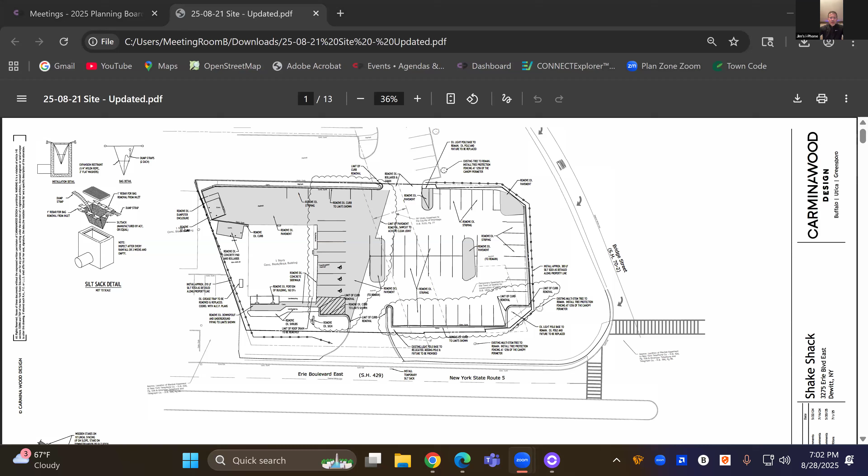Absolutely. We went to ZBA last meeting. We did achieve the parking variance that was required because the patio will have some seating provided on it. That triggered some additional cars in the variance that we needed. We also achieved the variance for the landscape buffer along Erie Boulevard. As with the DOT work, the property line had changed. We already had a bit of a variance in that, in a sense, but that variance was granted to give us the additional area for that buffer.

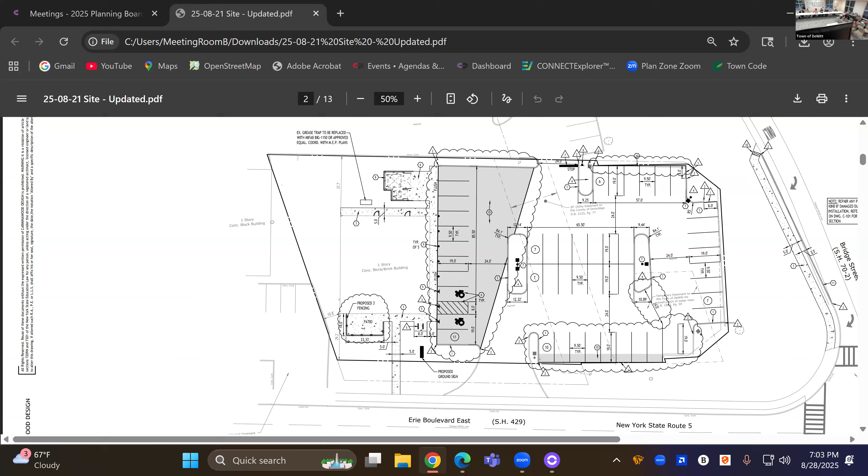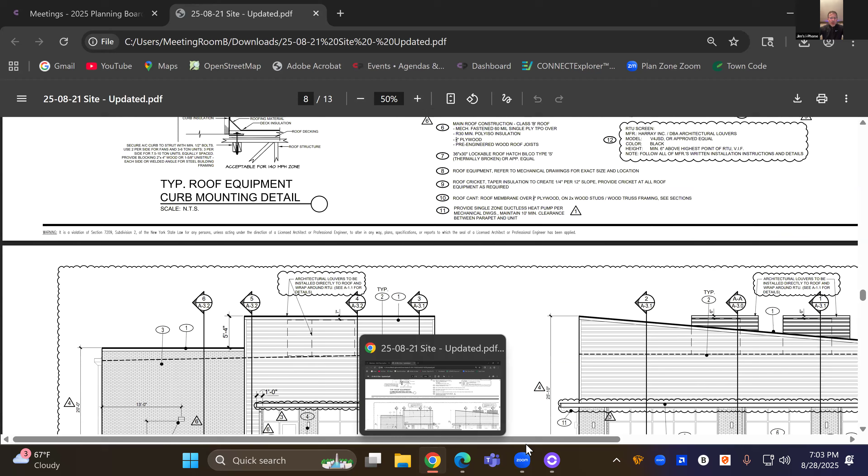Okay, very good. There were some conditions associated with the ZBA approval, one of which was the screening for the mechanical equipment. Can you just confirm that's the case and how you're achieving that, and that's shown on the current documents we have? It is, and yes, the comment was made that the rooftop units were visible, specifically coming down Bridge Street, looking towards Erie at them. So we have put a mechanical louver up on the roof that'll screen the 3 sides of that RTU that would have been visible. We took actual field measurements, and the agreement was we would go 6 inches above the highest point of the RTU, and that is represented in the new drawings. Excellent, okay.

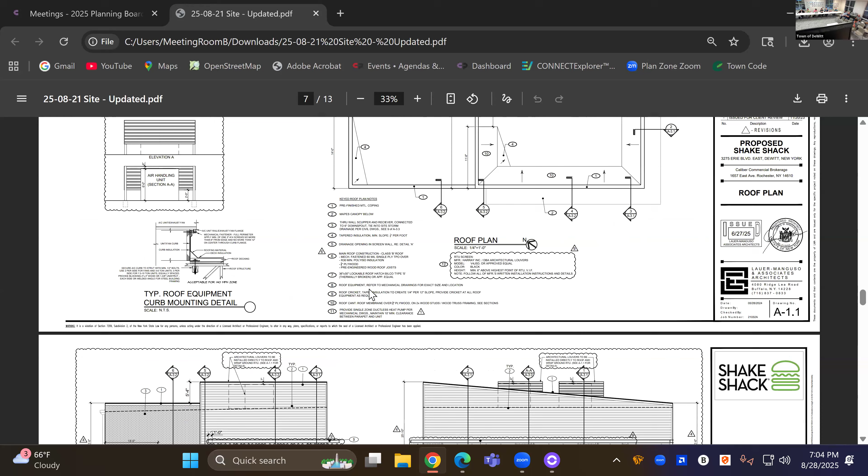Does the board have any questions on this final presentation? Okay. How about from the department, you guys are good? We're good. Good, okay. Then I have a resolution that I will read in favor of approving this amended application for Shake Shack.

This is a motion to approve the site plan drawing C100 as revised and dated 7/24/25, and the accompanying drawings C001, 101, 200, L100, LP100, A1.1, A2.0, A3.1 through 3.3, and E1.3, and the lighting cut sheets presented 8/21/2025, with the following findings and conditions.

There's an existing site plan approval for this site and use dated May 22nd, 2024, approved May 23rd, 2024. Applicant has requested modifications to the approval and site plan to accommodate a change in the parking lot layout, adding seating and fencing to outdoor patio area, revising the monument sign and lighting. These modifications require 2 variances from the Zoning Board of Appeals, which were granted on August 18th, 2025, as follows.

1, a variance of 13 parking spaces total on the site, so that the total parking spaces on the site will be 49 spaces. There was a prior variance in place for 7 spaces, so the variance will be increased by 6 spaces. This additional variance was necessary because the addition of outdoor seating on the revised plan required an additional number of parking spaces per the code.

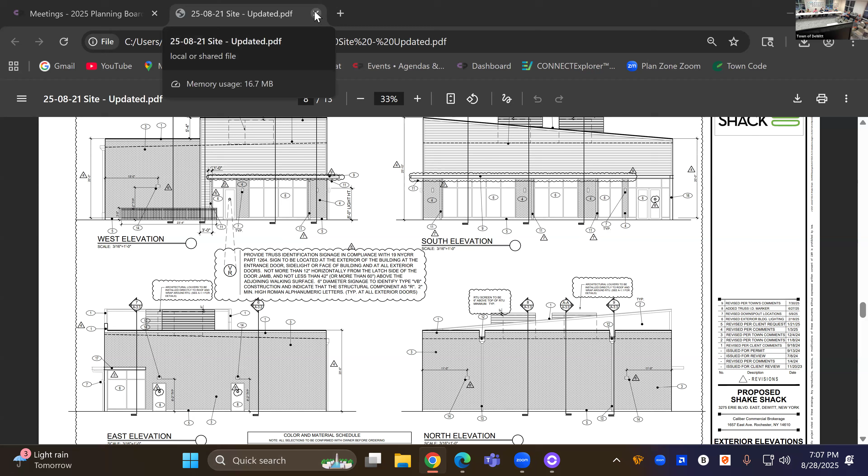Very good. Okay, next on our agenda is the Saab test facility on Collamer Road. Is the applicant here? Yes. I believe Aaron's online as well from EDR. Yes, I am.

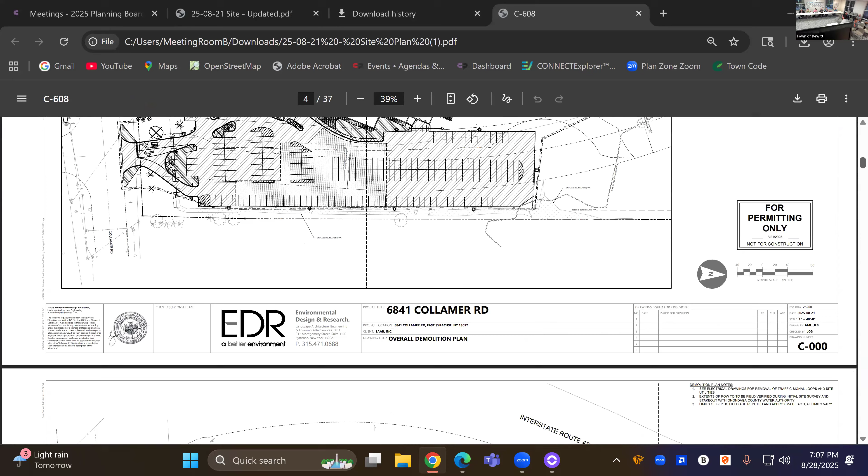Aaron, would you like to start or would you like us to start? What's Aaron's name? I can start for you if you'd like. What's Aaron's last name? Lehman, Lehmin. I'm with EDR, here to assist Saab with their application. And I'm Anthony Rojas with In Architects for the same application.

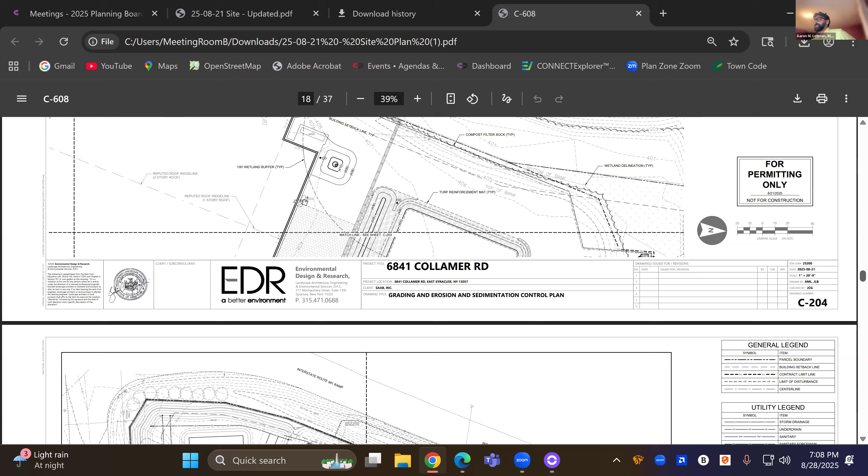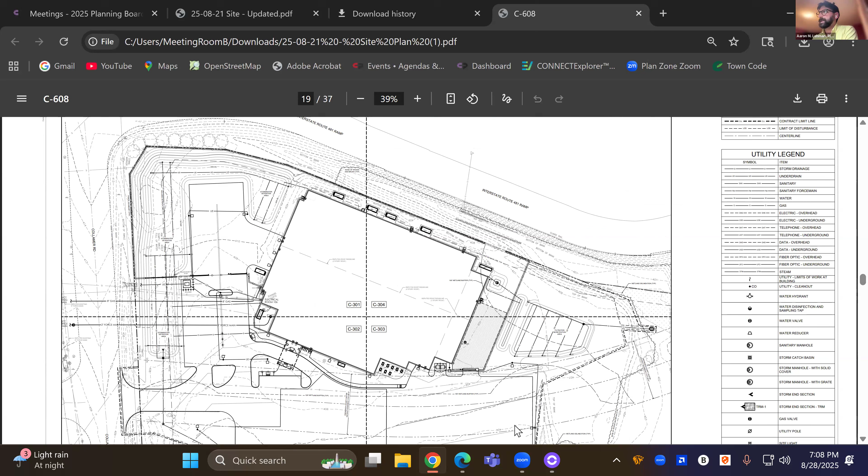You can go ahead, Aaron. So first, I'll just start by addressing the comments that we received in our last submission. The infiltration or filtration bioretention garden has been addressed. We have made the drainage layer 10 inches thick and added a detail of number 57 stone as per the engineer's comments. We have also updated the filter media and added the impermeable liner to meet the New York State DEC standards in their 2024 design manual.

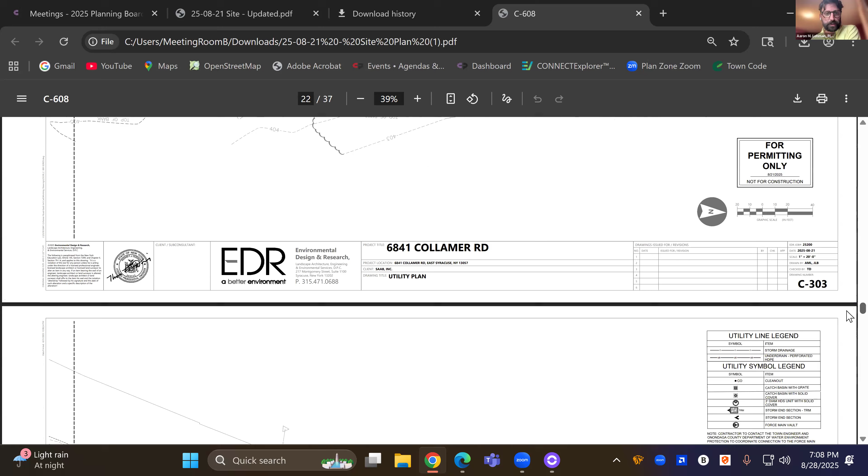The color selections have been made for the architecture plans, and I believe they have brought samples tonight if they wish to be seen, and they have been noted on the plans. We have provided the architect stamp and the final comment. We will be screening the transformer with vegetation as per the utility company's detail and not adding a fence.

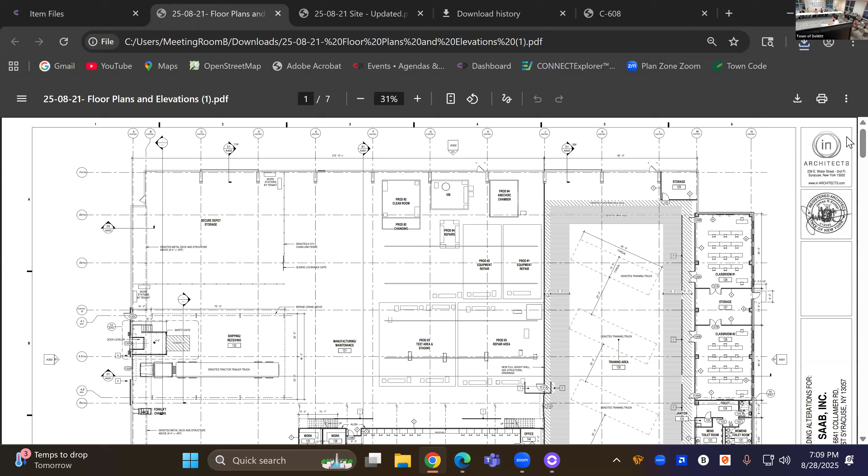And as Aaron mentioned, we do have a material board here. We have a couple, and I can pass this around. We've got a rendering that just identifies the different metal panel colors, and then a sample of those metal panels. We've got 3 different metal panel colors. It goes from darkest here to a medium to a light, and those are the 3 colors identified here.

The CMU block wall around the bottom of the building, which currently exists, will also be painted to match kind of the lighter color of that metal panel. And then the screens that you see here will be an aluminum fence that also matches the darkest value, as well as this fencing over here. So we're all staying within the same color palette.

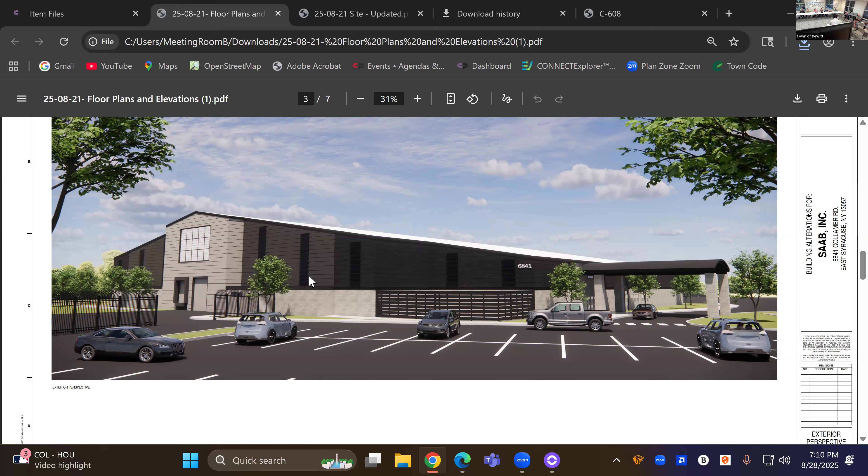The only difference with the metal panel itself is these kind of striations that you notice, which break up the monotony and the extent of it. It's really a textured metal panel with some undulation to create shadow lines, to again assist in breaking up the expansive continuity of that metal panel. From the roofing standpoint, it will also be a standing seam metal roof.

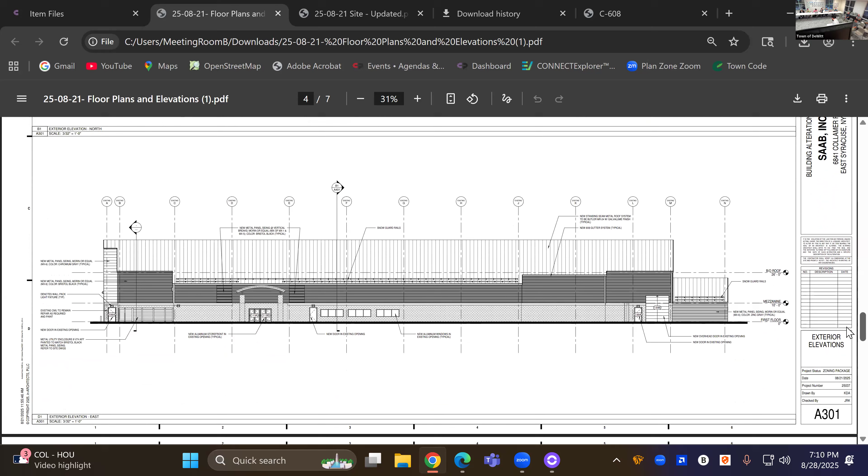Let's see what other materials—I think that might actually be all the materials. And the Kalwall is the translucent panel that exists in the center section here. That will also be replaced so that you have that same translucent material, but in a new upgraded format, so that it's not that yellowed type of color. It's more of a fresh install of the same translucent material.

Color of the roof? It's bright, like it's a gray, but with the intensity of the sun, it's really just going to look like a brighter version of that.

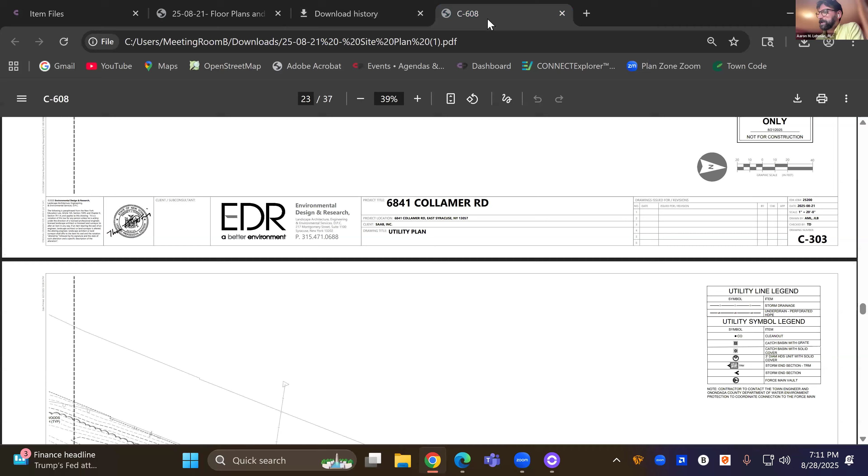Where did you say that the vegetative screening was? I'm sorry, I missed that part. No problem. So the National Grid standard is to have vegetative screening and not a fence. So we're adding a red twig dogwood, which will get roughly 6 to 9 feet high at maturity and spread anywhere from 7 to 10 feet wide.

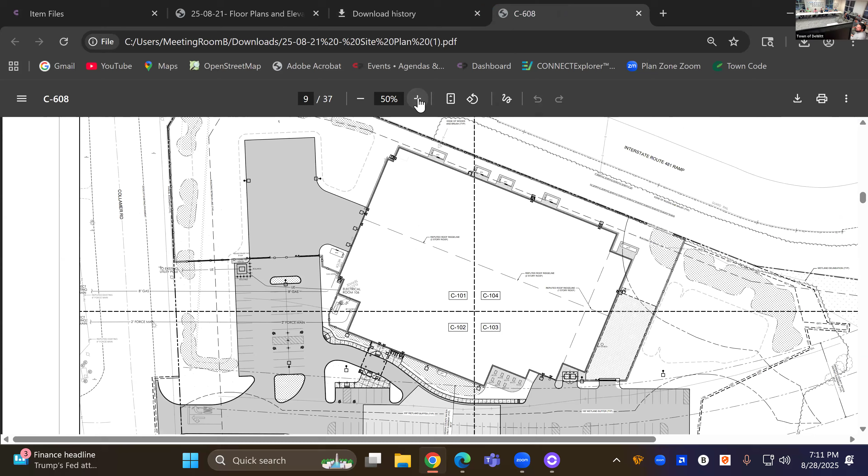It's around the transformer that's in the front yard. Yes, yep, it's right here. Yeah, that's it, right there. I could go to the landscaping page, I can't remember exactly which. We didn't show that transformer in that rendering, so it's not there on the program.

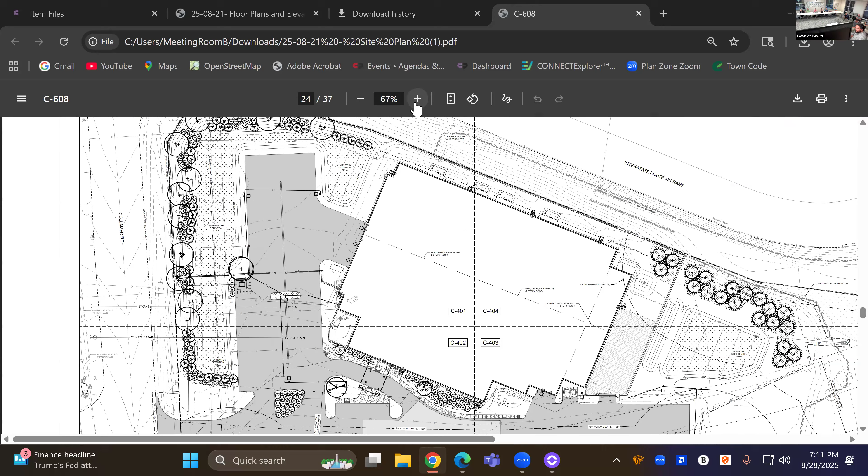It'll be the 400 series in the end. Yep, there we go, right there. Got it. Okay.

All the engineering and site comments have been addressed. And my understanding is there's no signage proposed, just the required building numbers, right? That's still the case. Any questions? Anybody?

Okay, I like it. And then on the material palette, you guys have any questions? No? I think it's pretty neutral.

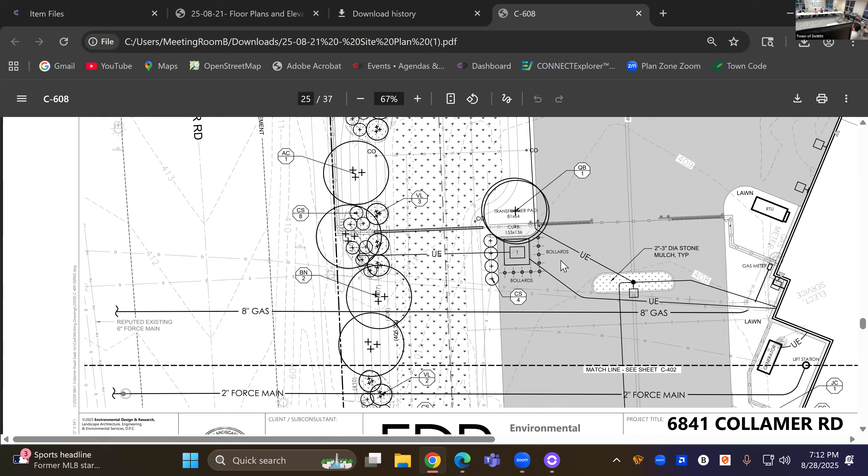Just the columns, what color are those? The same ones against the building, I'm calling them columns. Vertical, yeah. It'll be the vertical paint swatch all the way to the right, the square swatch. Yeah, it's a color to match the lightest metal panel, so this will come and match this color here.

These vertical pieces coming down, those? Yeah, those are just shadows that are cast, but they'll match the color of the panel next to it. So it'll be the same color, but you'll get kind of a shadow look because of the texture of that metal panel. Okay, so when you showed us that, that's more of a brown, but it didn't look that way on here. No, this is just to show the undulation of the panel. Thank you so much.

Okay, I'm going to read a motion. This is a motion to approve the site plan dated August 21st, 2025, including the architectural drawings dated 8/21/2025, and the photometric plan E100 dated 8/8/2025, and the lighting sheets dated 8/11/2025, with the following findings and conditions. And those dates are up to date, right? Yes.

The applicant has presented a new high-tech use for this property in a high-tech zone. Applicant has worked with the planning board to present a building and a site plan that is appropriate for the high-tech zoning district. The design, use, and site plan are an acceptable rework of a very different use and structure, being a prior sports facility building.

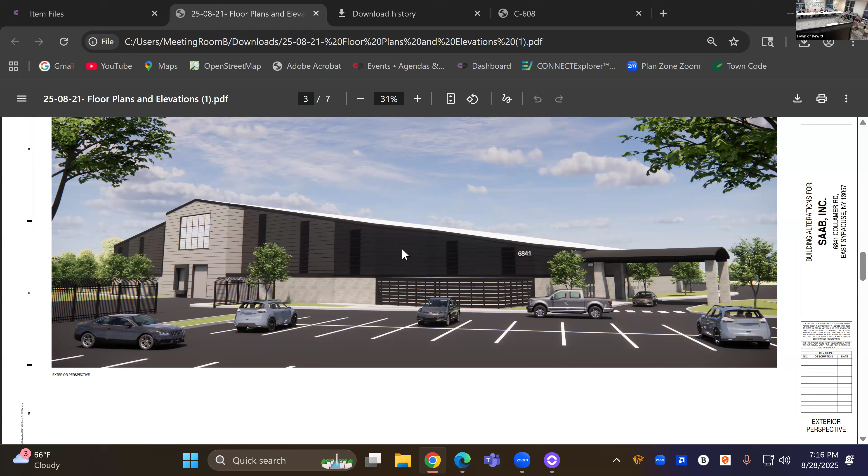This board has reviewed the SEAF of applicant dated 5/21/2025 and grants a negative SEQR declaration for this unlisted action. This approval is made with the further condition that it applies to plans and other submitted documents, site plan documents that have been signed by the planning board chairperson and the applicant, and requires that all of the work shown be completed by the applicant in order for the certificate of occupancy or compliance to be issued. Any proposed changes, additions, or deletions to the scope of work or materials from the site plan documents are not approved and are subject to further site plan review pursuant to Town of DeWitt Code Section 192-122.

Do I have a motion? Randy and Kevin. All in favor? It's unanimous. Very good, thank you. Thank you very much.

Would you like us to leave the boards or? You can take those. Okay, all right, thank you. Thank you. All right, have a good night. Thank you.

Okay, third on our agenda is Sunoco, also up for final approval. Yes, William Pitcher from WJP Architecture.

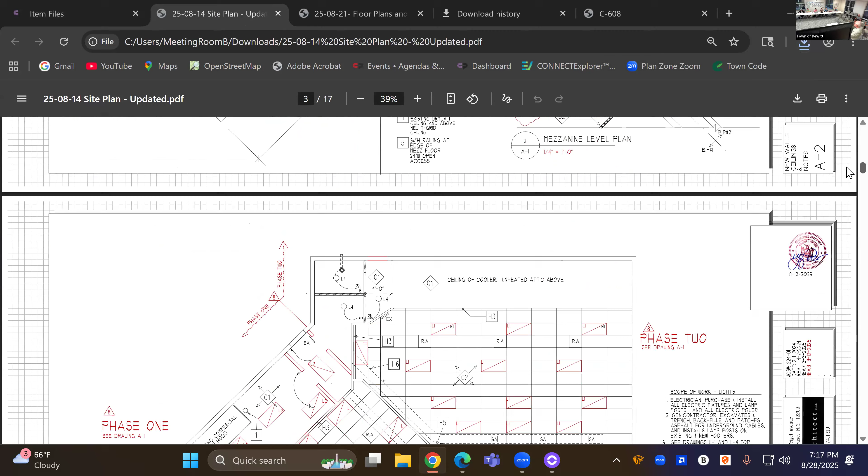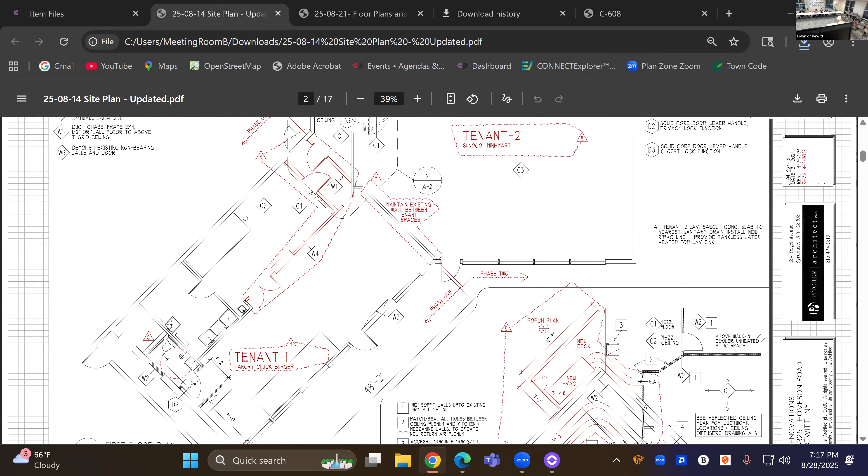Let's go to A2. What we're asking for, what has previously been approved, is a single tenant, single signage thing, and we were in the original approval removing that wall. In discussions with the franchise, Hangry Cluck, they want basically separation between the tenants. So that's the interior change that we're making, is to keep the two spaces, and that is the second tenant space. Going down to A5.

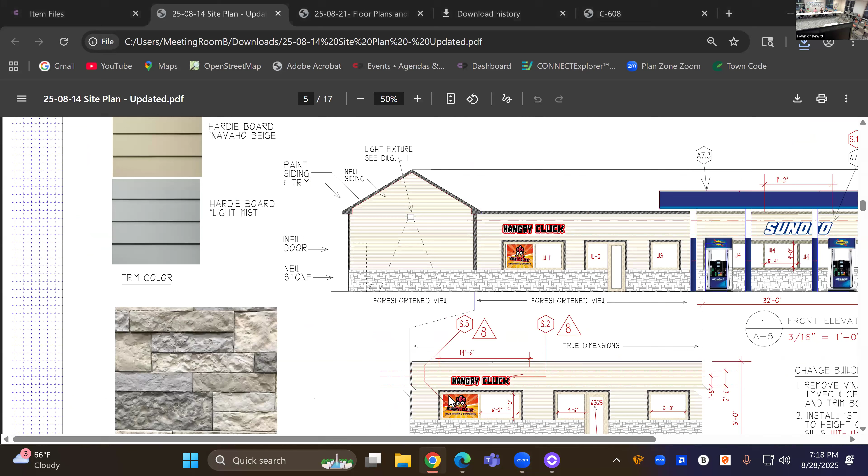Okay, the first tenant signage was previously approved. This is the second tenant signage that fits within the advertising band, and we also fit under the 25% area of window usage.

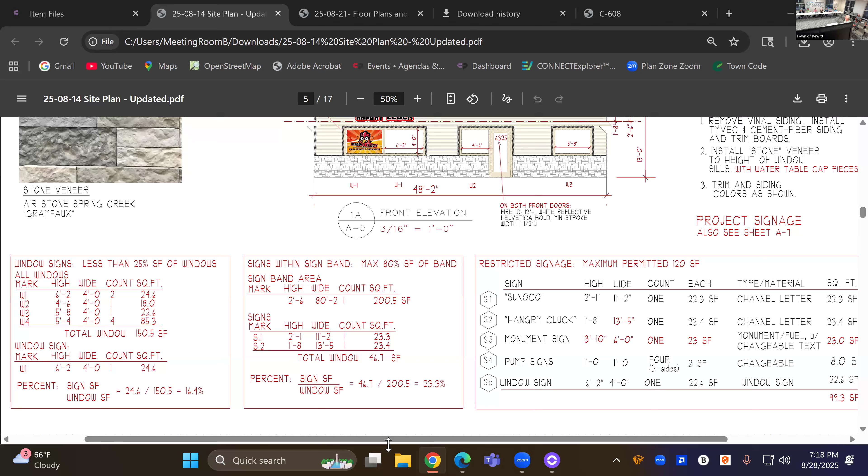And if you go a little further down, those are the calculations showing compliance with the zoning code. So this is a multi-tenant sign plan. If we go down another page, there isn't much change here. Right here on the bottom, the other change we had to make was that the HVAC units would not fit inside the building, so we are adding that screen around the ground unit, and we're building another platform porch for the second unit to sit up top.

Those units are fully screened, and they also face the back of the property, which is the creek and the woods, so they're not visible from the front road. Where's the screening? Sorry, it's so well drawn I can't even see the screen. It's a dotted line, it's right there. That's the fence screen for the ground unit, and the one on top of the roof is the same height.

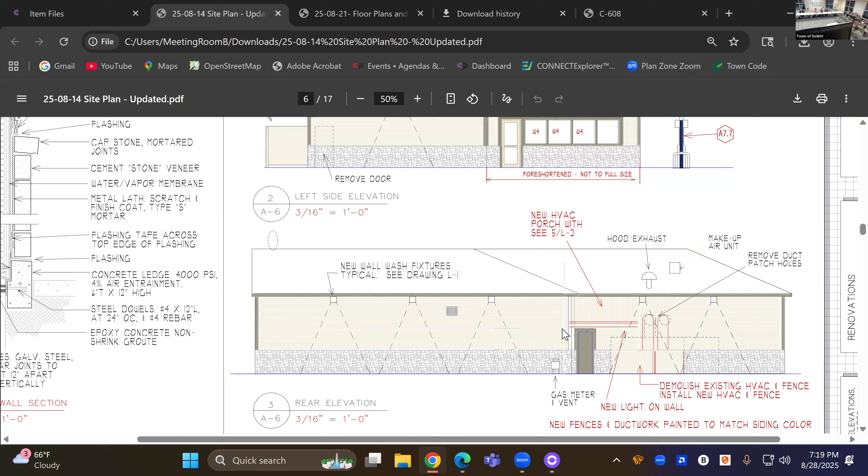We're talking 4 feet. So those are the changes there, and then going to the site plan down to L1.

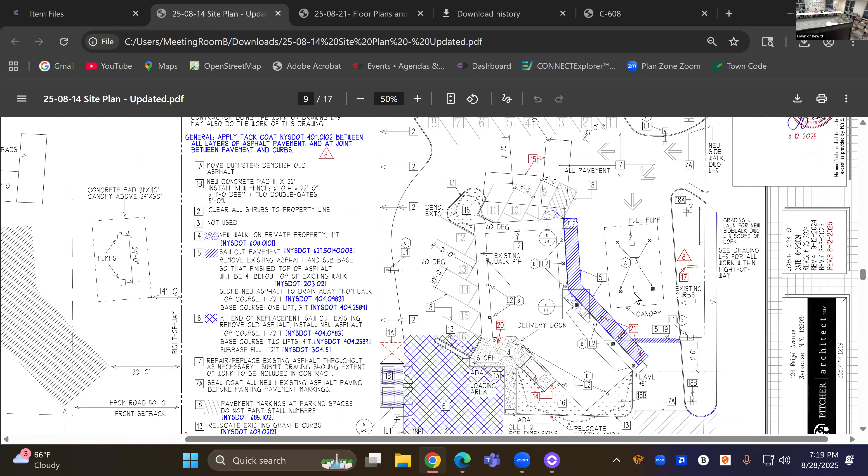Okay, in the original approval, we didn't have the existing monument sign, and we are requesting this time to maintain the existing monument sign. And the changes will be down a little further, the other way, right there, the bottom of this page.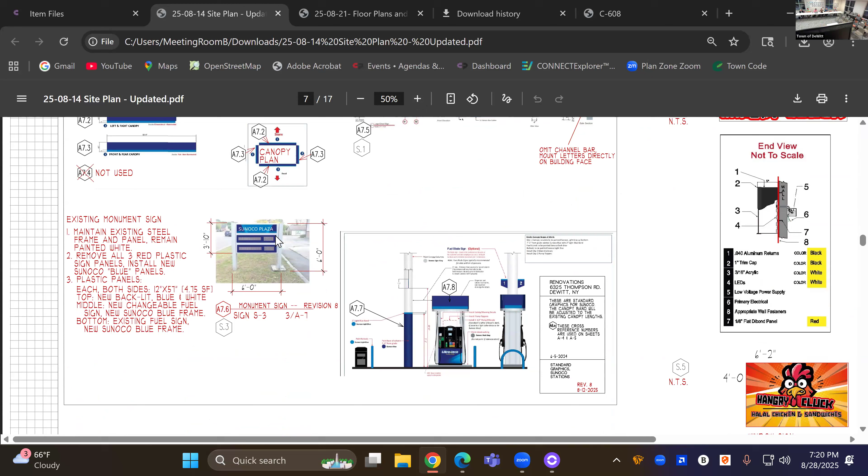And it had 3 bands, the existing sign had 1 changeable band and 2 solid bands, and we're proposing 2 changeable bands and 1 signage band. And all of those meet the square footage requirements.

Was that on the original or the prior site plan approval? No, no, this is something different. But so this is existing, the structure exists, correct? Right, the structure does, on the first set of approved plans it was shown as to be removed. And we have since decided to keep it rather than putting a new sign up. We're permitted the changeable sign under the code.

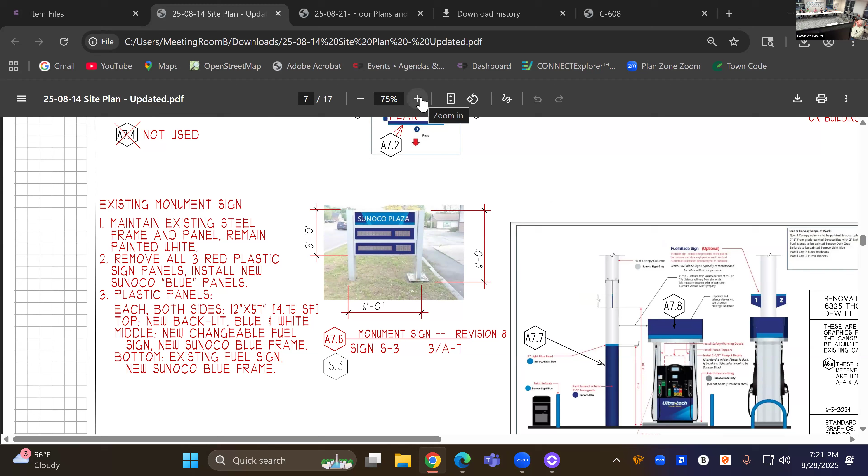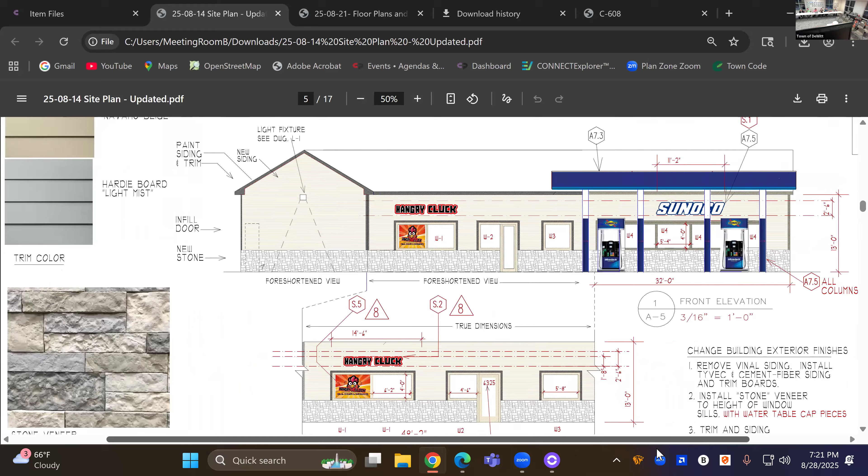I think that's it, unless you want to look at the interior drawings or see what's changed on the floor plan. The building mounted sign for the tenant, the Sunoco, that was previously approved, there were channel letters, as well as Hangry Cluck.

Down the next page, this is the detail from the signage fabricator that was going to make the fonts. So basically, this is your cross-section showing the letter and the wall mounting.

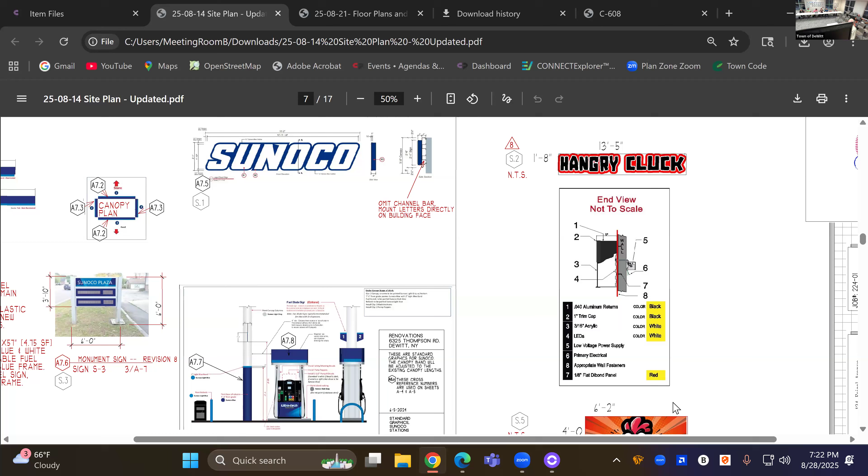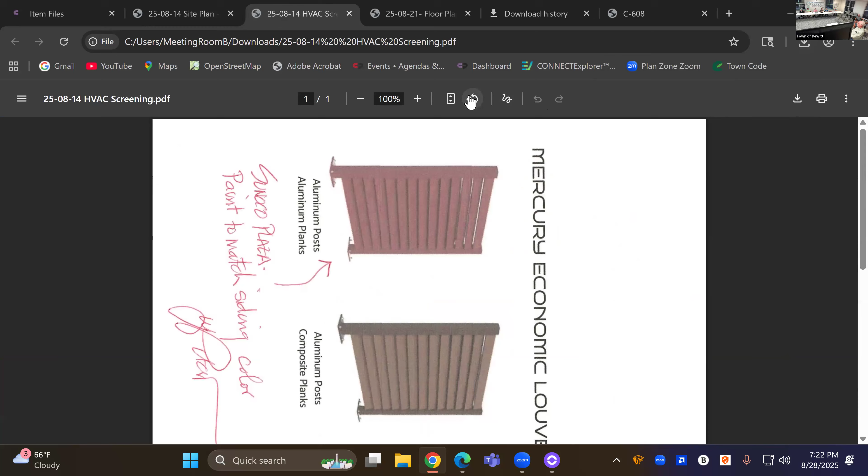Any other questions? Is there a cut sheet for the screening of the elevated unit, or any? I handed in a cut sheet for the louvers, it's an aluminum louver, there it is. This is for the elevated screening?

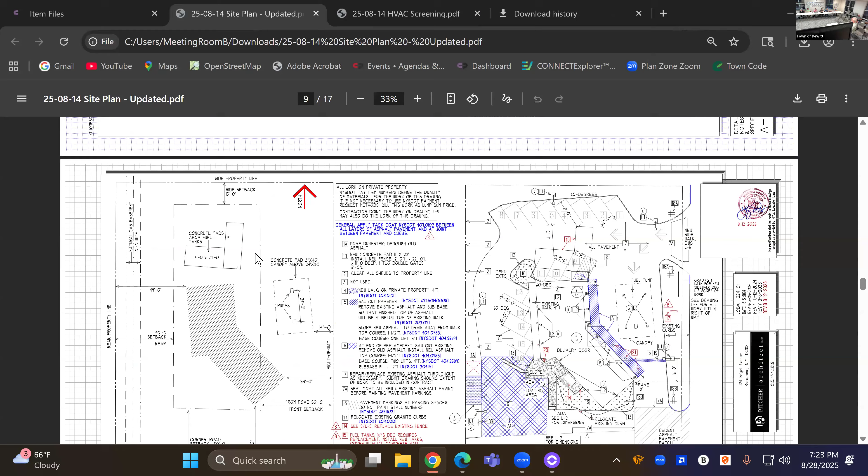Yeah, this is, well, it's going to be for the louvers on the lower level, because that's also the discharge side. And it's going to be on top of the porch, because that's the discharge side of the HVAC unit. So the fences are on the non-ventilated sides of the unit, the ends of the unit, and the louvers are on the front of the enclosure.

So this is the lower fence and louvers, and this is the upper platform, the porch roof. What's the porch deck? It's all going to be fabricated metal, square tube, steel plate. Like grating? No, because we're trying to keep it as a porch, so we're going to let it drain off of the steel plate rather than rain through the grating.

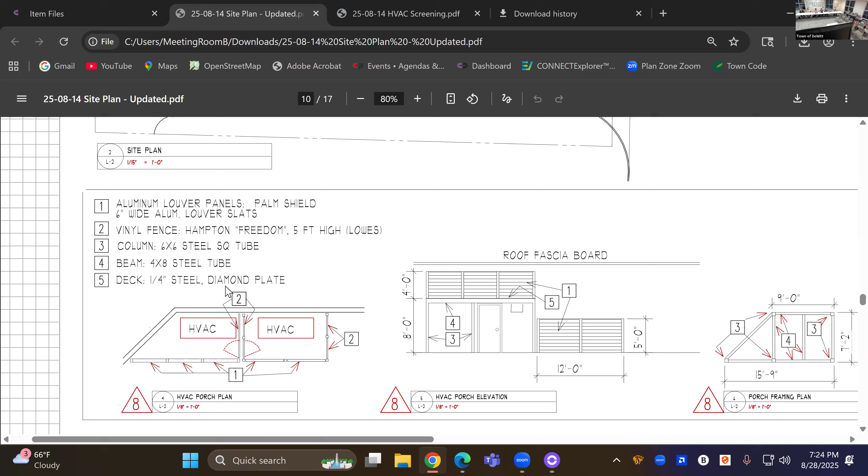You're not worried about it collecting snow? I wouldn't think so, because basically all of our discharge is in this direction, so I'm pretty sure the exhaust air blowing out of the unit will probably melt all snow between there and the louvers.

Well, I guess now's the opportunity, if you wanted to put in any snow retention, any snow pads on the roof, that's the time to do it.

Is there a maintenance panel? Is there access to get in? Basically, what I was looking at, these doors here, the doors in the fence, so on the lower level there's a door here, and on the upper level it's the fence here, and it's not shown, but the workman brings a ladder to service the equipment. There's no fixed ladder, so you don't have vandals getting up on the roof and on the equipment.

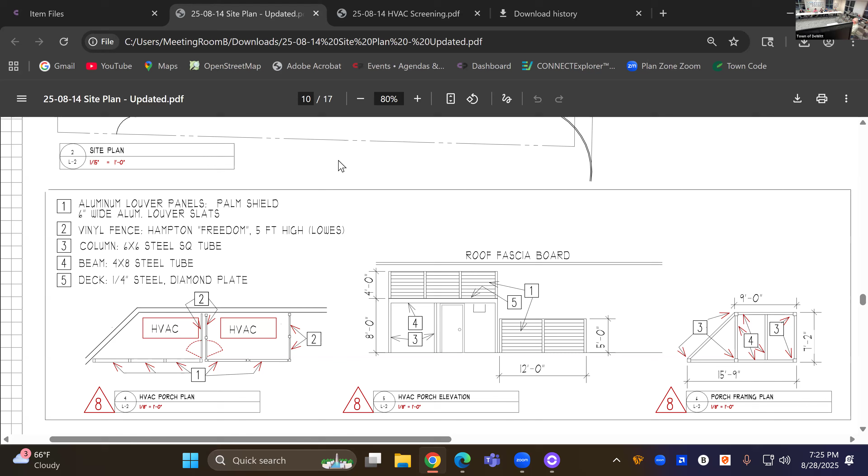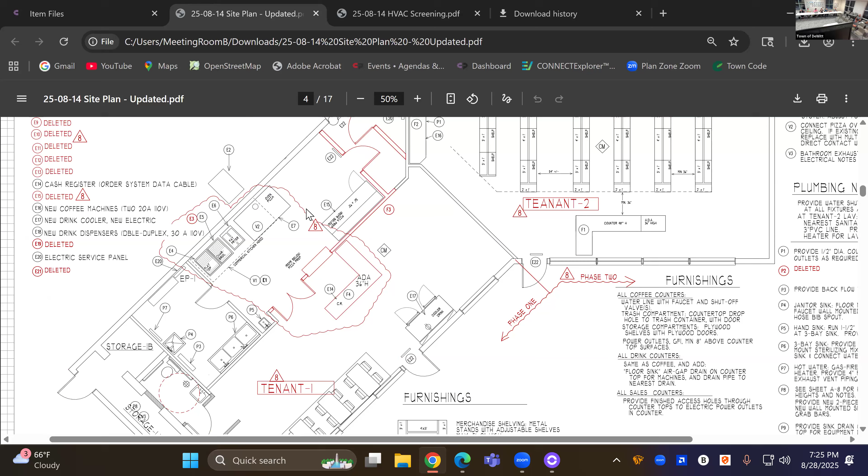Well, this is all in the back, it's not visible from the road frontage, right? Yeah, if we go back up to the floor plan, A2. This is where the fence is, this is the existing unit that was being taken out down a little more. And this is where the new porch is. If we go down to this detail down here.

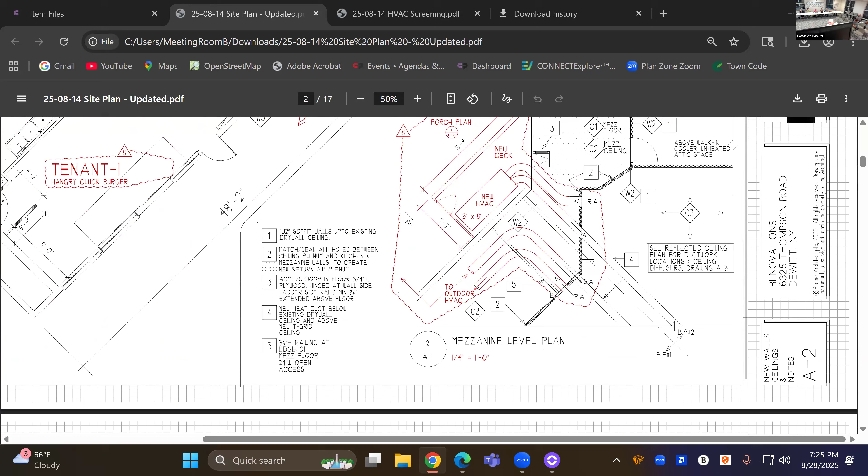Over. Oops, next page. No, oh, we're only on 3. Let's go up 1. Up again. Here's the detail. This is the platform for the HVAC unit. The fence is not shown on the floor plan, so it's all in the back, and it's all facing the creek.

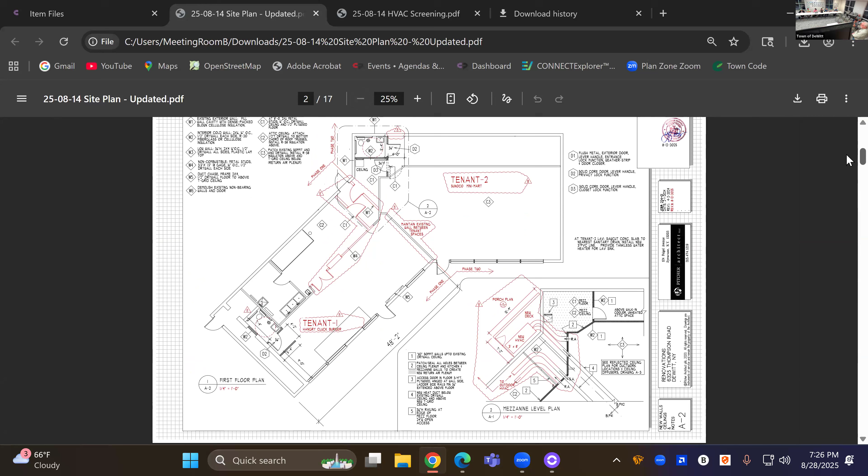Okay. There were no other comments from you? Nope, guys? Meets the multi-tenant site plan. Does anybody else have any questions? No? Maybe we should add a line to this saying that the tenant sign is accepted specifically.

Can we also just say that the monument sign is existing as part of that? Sure. Okay. Here we go.

This is a motion to approve the site plan as revised and dated 8/12/2025 with the following findings and conditions. There's an existing site plan approval for the site and use dated March 27/2025. The applicant has requested modifications to that approval and site plan as they are adding an additional tenant to the project, making the building a multi-tenant structure necessitating additional signage and modification to the monument sign. The signage plan, multi-tenant signage plan as shown, is accepted, noting that the monument sign is an existing monument sign. This approval is made with the condition that except as specifically modified herein, the planning board approval of March 27/2025 is in full force and effect, including all findings and conditions therein.

Do I have a motion? Bill? I'll make a motion. Doug? All in favor? I see everyone, unanimous. Okay? Congratulations. Thank you. Thank you.

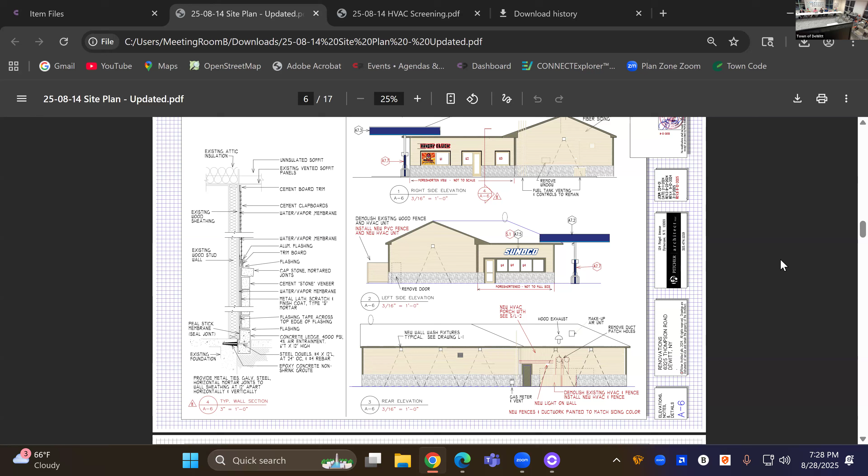Okay, the last on our agenda tonight is Dunkin' Donuts. Duncan? You're Duncan. I'm Duncan. This is it. So what's the question? What's your name? My name's Terry Summers. Thank you, Terry. So this is a concept presentation. This is kind of the first time the board is seeing what you're proposing. If you could give us 5, max 10 minutes, what the proposed scope of work is?

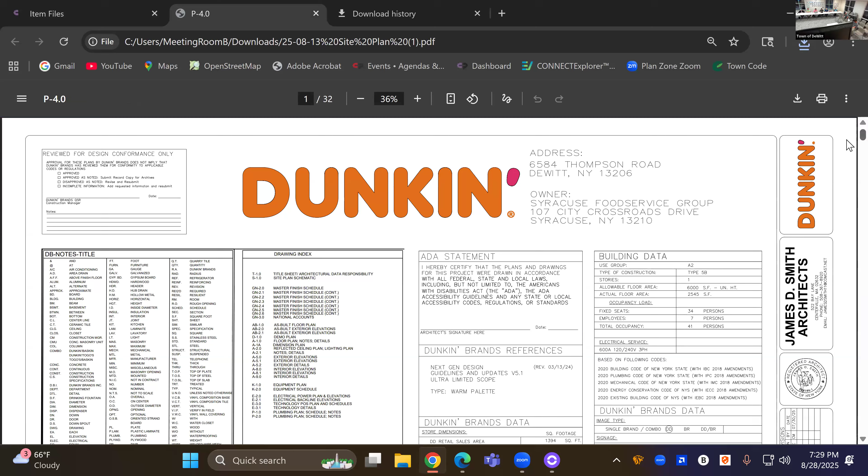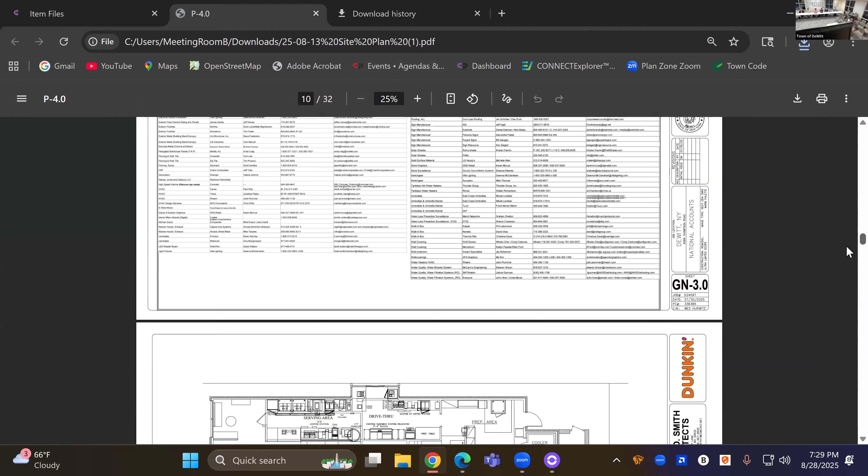Essentially, it's a paint polish. We've done them for most of the facilities around here. That's Tom Santori. Tom is one of the owners. This is essentially a paint polish, taking the exterior. We're not touching the brick, we're not touching most anything, we're just painting the siding, trimming, fixing up the trim work.

There's 3 signs right now on the building, it's gonna get reduced down to 2 signs. That's correct, Tom, right? What are you reducing? Tom, you're muted. Did you get Tom's last name? Tom Santori. Thank you. Hold on, we can't hear you. Can you hear me now? Now I can hear you. Yep, the exterior sign on the back of the building will be removed.

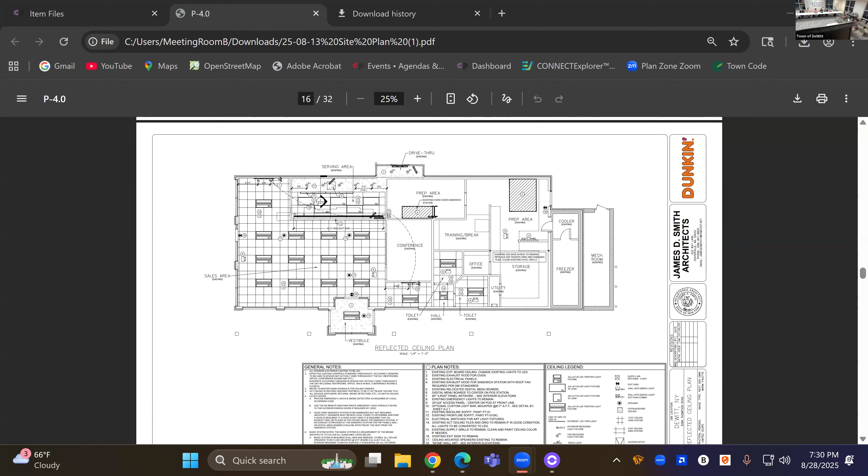Okay. Yeah, if you go up, you can see the existing signs that are there now. Keep going. So, right there. There's 3 signs on the exterior. Currently, we have 81 square feet of building signage, and we're actually reducing it to 56 square feet.

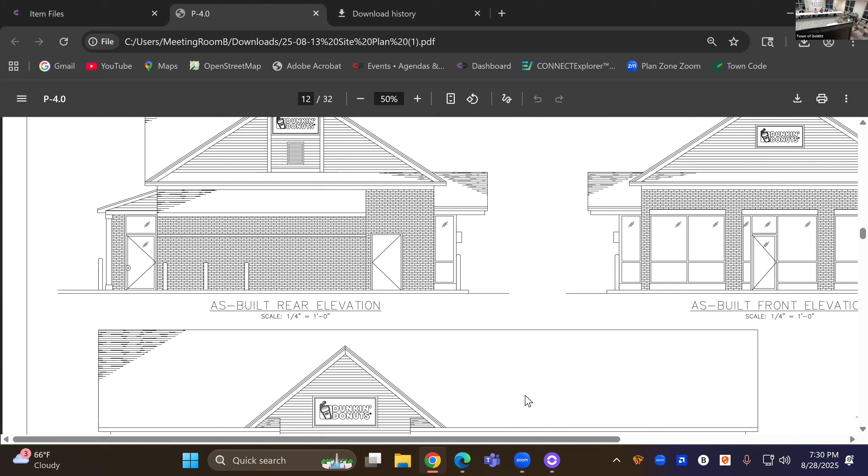So if you go back down, the existing monument sign will have the faceplates replaced with an updated one. On the same monument structure? Yeah, it doesn't change, just the faceplate changes. So is that monument sign 9 feet tall? No, it's like 5.5, maybe 6.

Are the drawings outside printed to scale? That's just a copy and paste, I doubt it. I mean, the current monument sign's been there since we got approval for that project. Roughly how tall is it? The top of the bricks, yeah. I'm gonna say 6, 7 feet tall.

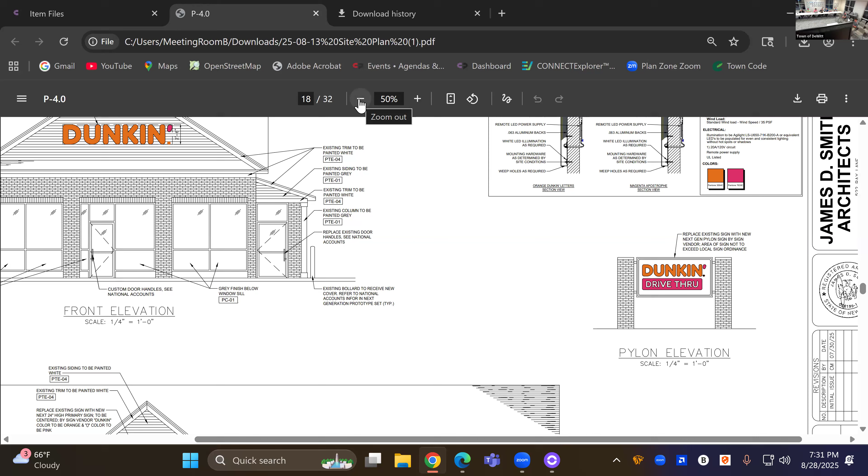We're gonna need dimensions on that. Okay. Yeah. So when we built that property originally, everything was per code, approved variances. So my question is, all I'm doing is changing the face that's on the existing sign that was legally allowed on that property. So what question do you have for me? The question was, from the drawings, it appears that it's 9 feet tall on the scale that was used. Yeah, they actually put a scale on that thing, but...

Never. I mean, that's honestly, it's a cookie cutter drawing. They don't go out and physically measure. The only thing, per my franchise agreement, the only thing we have to do is change, it says Dunkin' Donuts, it has to say Dunkin'. That's it. Nothing's changed physically. It's the same exact monument sign that was approved or had a variance, grandfathered. So I just don't understand the problem with just changing a face.

If it's actually 6 feet tall, there's no problem. But we need to know the dimensions, when it was approved. The town of DeWitt approved it, so what's the problem with just changing a face?

You have to check your records to make sure the variances were approved. We've already pulled the variances, we just need to see the sign dimensions. The physical sign dimensions are the same.

It's a face, we're changing a face. We understand, but you need to see them on the plans, dimension the exact existing conditions, please. I can take care of that tomorrow, Tom.

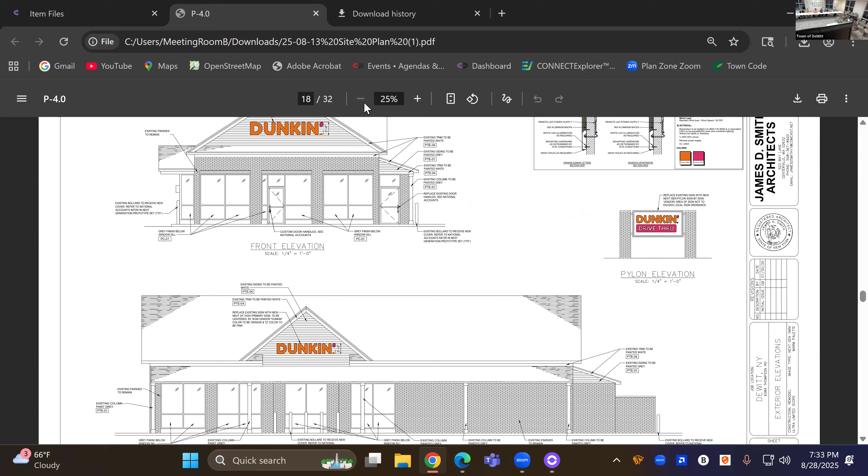Directional signage, wayfinding signage? Oh, painting on the asphalt? No, the sign at the end of the page. You're talking about your entrance signs, Tom, are you going to be using those or not? No, your signs, directional signs, it looks like you put them in the ground.

Can you see our screen, the screen that's being shared? No, I don't. I see. I had to make sure. Hold on one second, I think it is, because I thought I had that selected.

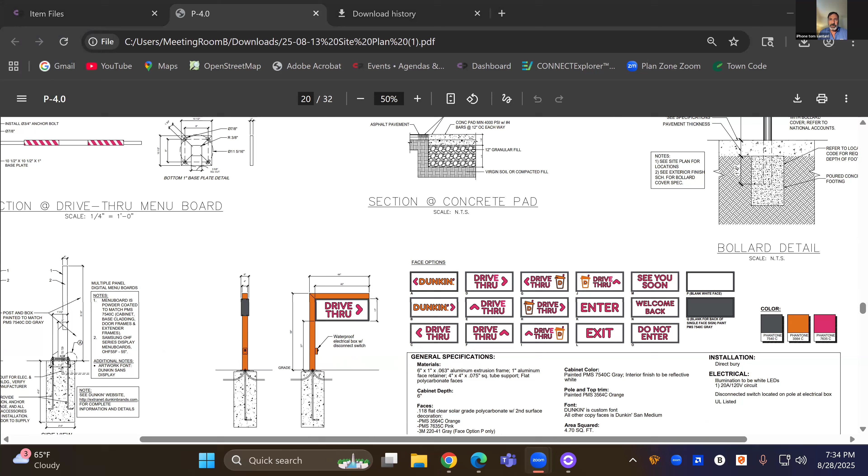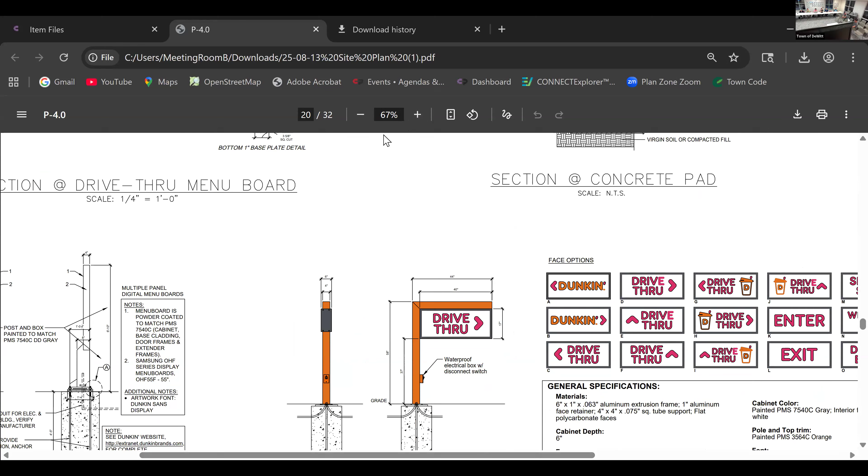Basically, whatever's there, the only difference would be it changes to Dunkin'. You're not adding any signs, other than any of those cookie cutter things, they're not going to be using them. Any of those on the plan, existing or proposed, whatever's not being used on this site, we don't want to see it on the plan, it just causes confusion.

Can we talk about the pavement markings too? They're eliminated, that's a Dunkin' cookie cutter thing. We don't paint pictures of cars on the parking lot. I'll mark those off too, take those off the plan please.

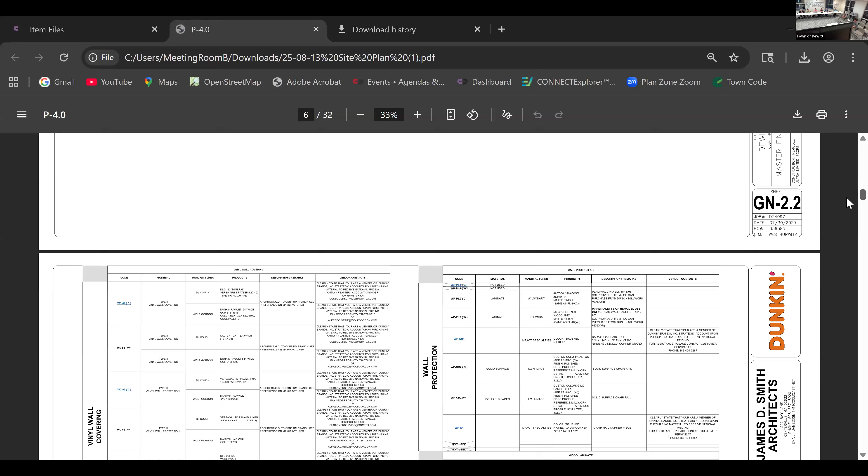Okay, that's easy enough. Are there no other pavement upgrades? The only pavement upgrades, I'll have an asphalt company come and fix all the potholes and saw cut. Nothing's physically changing other than making it smoother.

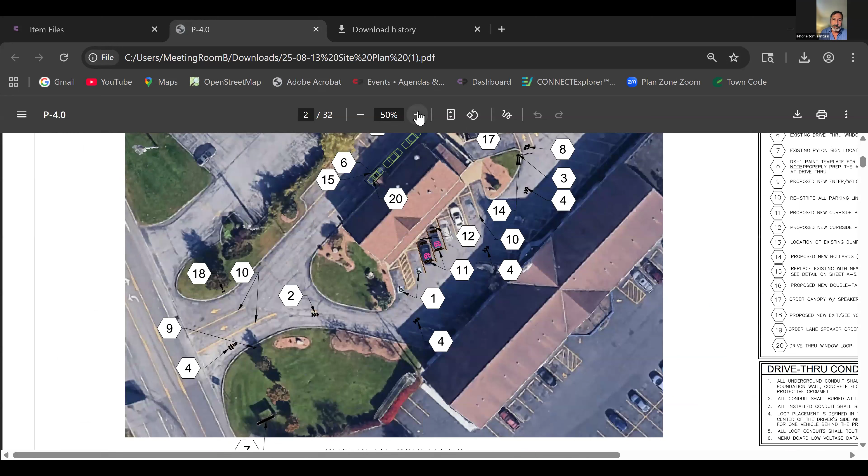What about the clearance bar? You want to change that out, an updated one and a menu? I could change it to the most current, or we could keep the same one and just paint it gray.

Basically, we want to see what you're proposing for this location, not just an option of everything that's for corporate, all the locations. We just want to get an idea of what you're proposing to do with this scope of work. All right, I'll make it exactly what this project entails.

I'll make it real simple. The monument sign physically is staying the same, I'm taking the face off, putting the word Dunkin' instead of Dunkin' Donuts. The menu board is in the same place, we take it out and put a digital menu board. The height bar either stays the same physically, or I take that out and put a new one.

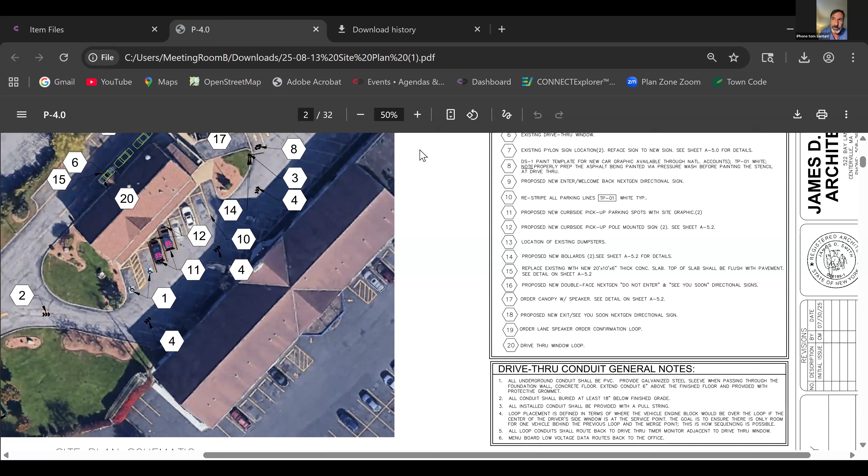Any enter exit signs will be in the exact same place they are, we take the face off and just put a new logo on it. The parking lot will be repaired to make it smoother. Is it being restriped? Restriped exactly how it's been for the last 20 years. Do you want it restriped? No, that's fine, but you have some parallel parking spaces here, that's not allowed.

We could update whatever you want. Basically, everything's staying the same, it's really a simple project. We're keeping everything physically where it is, keeping the brick exactly how it is, we're not painting the brick. The soffit has some painting done. The vinyl siding that's existing will be painted to the current colors, which I believe is like a light gray.

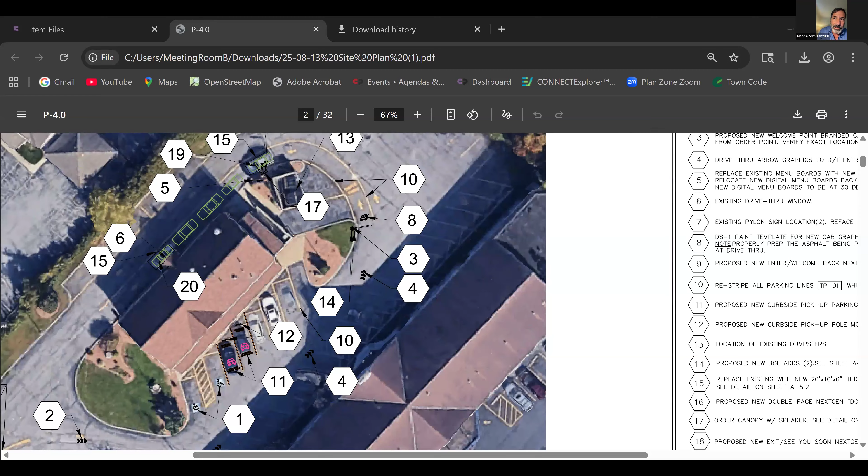Landscaping will just be improved to physically exactly where it is, just make it look nicer. We're making site lighting upgrades - no, actually no site lighting or lighting changes, nothing. It's basically what's there, we're just making it newer.

We hear what you're saying, just make sure the drawings also say that, exactly what you just said. That's the takeaway from today. Yeah, and Terry works with our architect, he knows what we need done. He's built 20, 30 projects for us.

So how about the dumpster enclosure? I spoke to Terry two days ago. It's a masonry enclosure, we're gonna repair it. Right now it's cinder block and in bad shape. Terry's basically going to have his mason repair all the bricks or replace the whole structure. Physically, you won't even know the difference. It's going to be a brick dumpster enclosure.

Again, if it's replaced, we wanna see it. Yeah, it won't be replaced, it's basically making it look brand new. A lot of bricks are pulling away from the CMUs, so we're gonna repair all that.

You planning on doing a new gate for it as well? I'll have to see what kind of shape the gate's in, if we've gotta replace it. It looks pretty bad, it's rough.

The town requires self-closing gates for the dumpster enclosure, you can look at our code, there's a section on dumpster. Is that like in the pole where the gate is? It has like a spring-loaded thing that self-closes, or how does that work? Essentially, yes. So self-closing means basically if no one's there, it closes by itself.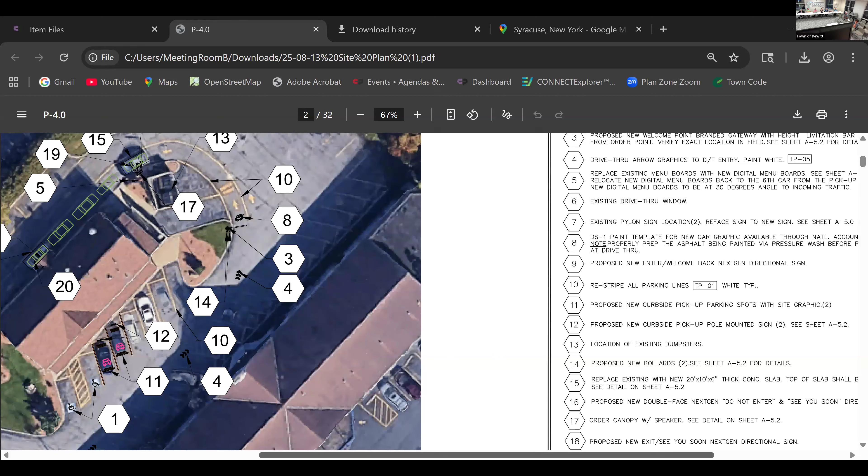So the monument sign, can you pull up that image again? The town code doesn't allow drive-through on there, it can say Dunkin', but it can just identify the property. It should have the address on it too, technically - the street number. And that's another thing too, is the address 6504 or 6584?

Do we want them to work with the county? Call county planning, because we're having trouble figuring out what the address is. I couldn't find it either. County planning handles 911 addressing for the county, and you should reach out to them because you want the fire department to be able to find it. If there's a problem with the address, you're gonna have trouble getting the fire department there.

Typically in other areas we require buildings to put the address numbers on the building - do you need that? Yes, put it on the monument sign. Oh right, on the monument, yeah, it can just say the number, like a placard on the column of the bricks, or where it says drive-through, because you're not allowed to say drive-through.

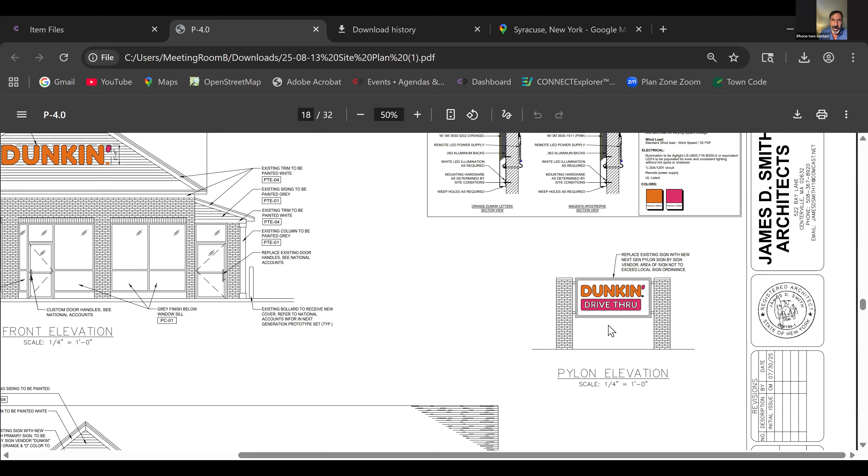Why, is that a bad thing to say drive-through? It's just not allowed. Our signs can just identify the use. Oh, is it illegal to have a drive-through? No, I mean, it's not illegal, but it's against the code. The code just says your monument sign can only have the name of the business.

So you don't want us to succeed as a business? Well, I don't really like the banter much, but there's a town code and we have to do what the town code says - that's the parameters we work within. Yes, perfect, we'll abide by everything your town wants to do.

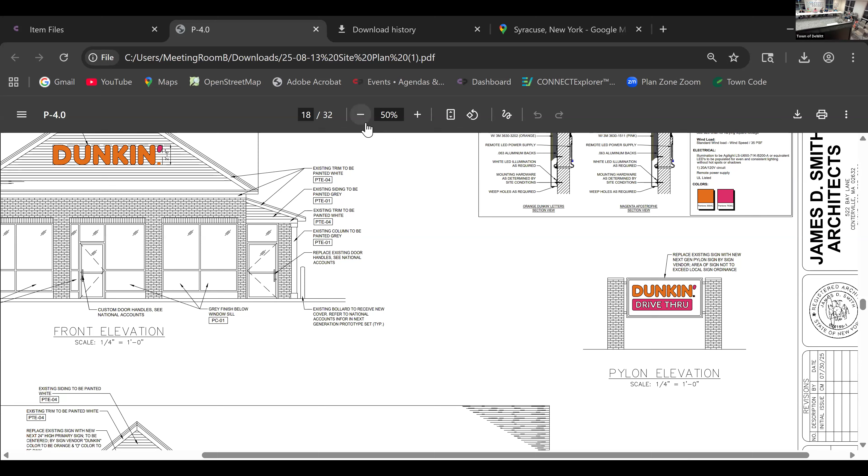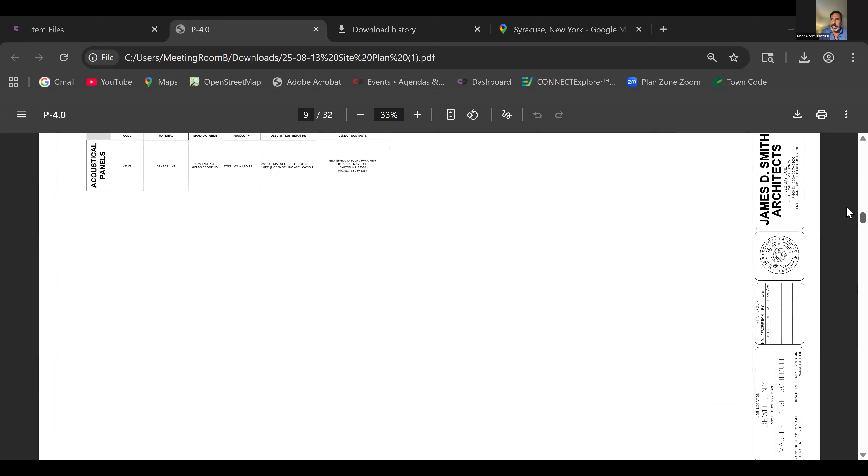I heard you're not doing the pavement stencils, are you doing mobile pickup signage? No, none of that. The existing parking spaces will just be restriped the way it is right now, except for the parallel spaces on the side here. Correct.

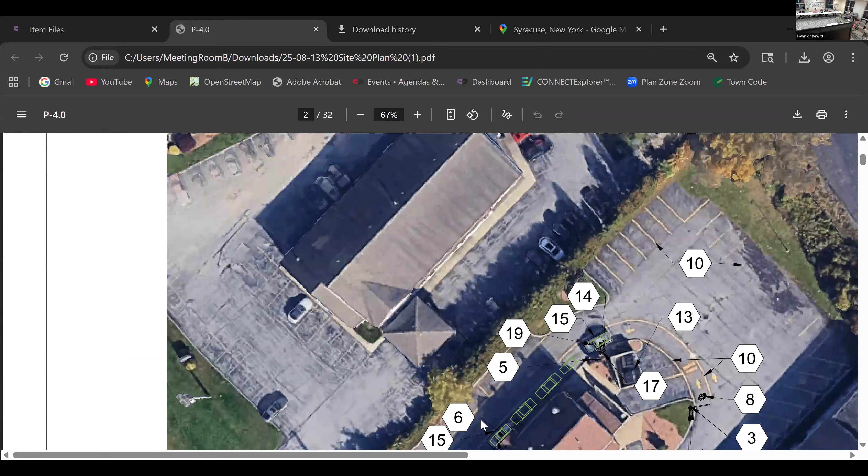And Tom, I'll take a drive-by to make sure. I'll measure up to your existing monument sign and we'll mark up a drawing and get back to you.

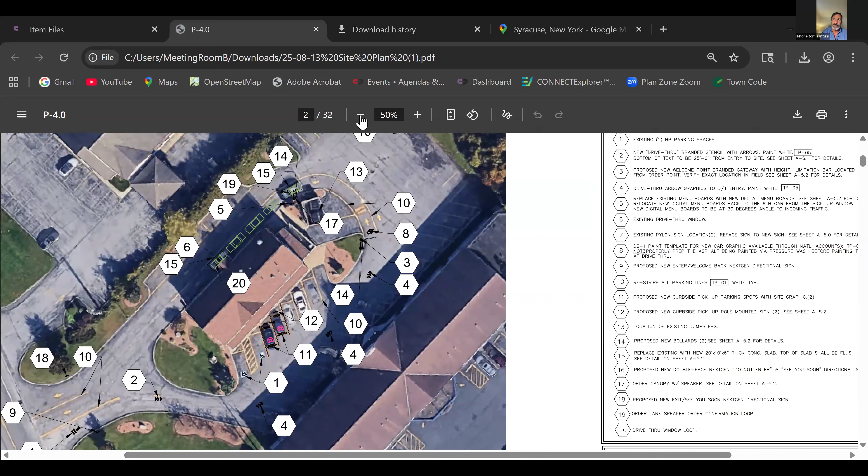So basically I was going through these points and there's a lot of things on the plans that doesn't sound like you're doing. That's the main takeaway from today, we kind of pick and choose. Yeah, the goal is just to make the building look better and make us profitable to be able to still do business.

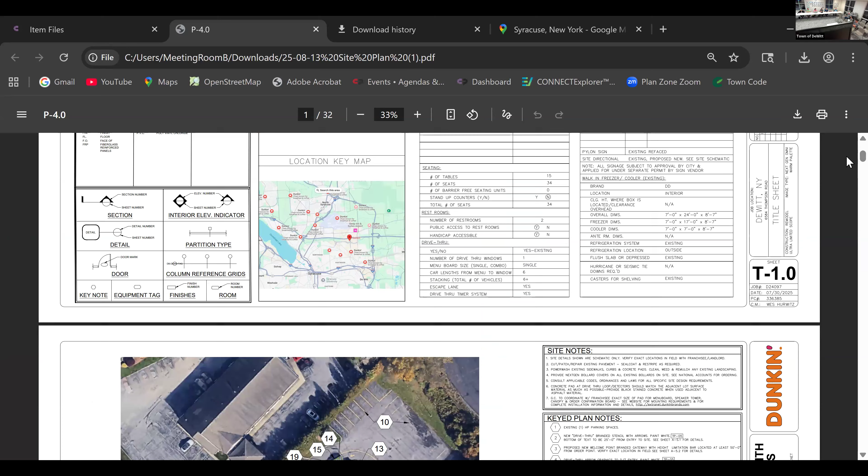Absolutely, and appease Dunkin', the Dunkin' brand. If you have any questions, Eric's available. If you go out and wonder what you should do, you can check with him, because we're just trying to live up to the code. There's no real magic to what this board needs to do, it's all in the code.

I apologize, sometimes common sense is what I live by. My goal is to have a successful business in that area, make everyone happy, pay taxes, employ people. At the end of the day, you have to have an ROI to have a business, so you just have to use some common sense, that's all.

These comments will be provided to them as well, a comment list, is that true? I'm not so sure there needs to be a comment list, I'd rather see another submission first and then provide comments. Can I get it right over to you tomorrow? Absolutely. Okay, we're here? Yes. Okay, perfect, thank you.

Quick question, so once we get all the ducks in a row that we need and you guys are satisfied, what's the next step to get a building permit? Once you get site plan approval, then you'll apply to the Department of Planning and Zoning for a building permit. Typically, how long does that take?

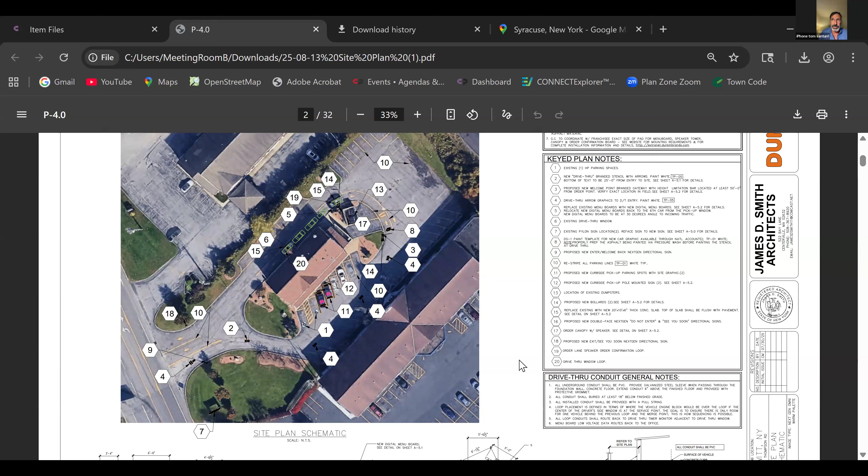Usually within a couple of weeks. Okay, so we were hoping to start the project in October, you were looking for September 26th or 27th to get underway. Well, the next meeting, if you get the things in, will be September 25th. Today was the deadline for our September 11th meeting, and September 11th is the deadline for the September 25th meeting. So I can't even get an interior permit? You can't get a permit until you have site plan approval.

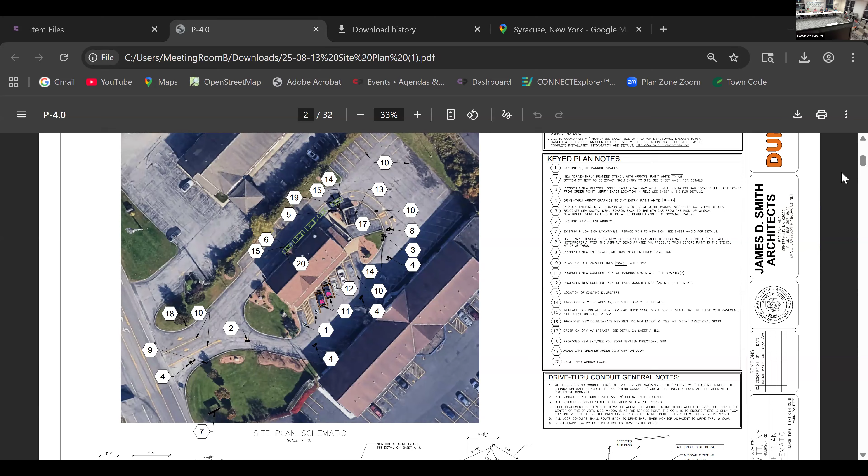What if I separate site work from interior? You have to get site plan approval first. What are the interior changes you're making? We're just changing out a bunch of equipment, which means I may cut the floor in some areas, put some plumbing in, and put it all back together.

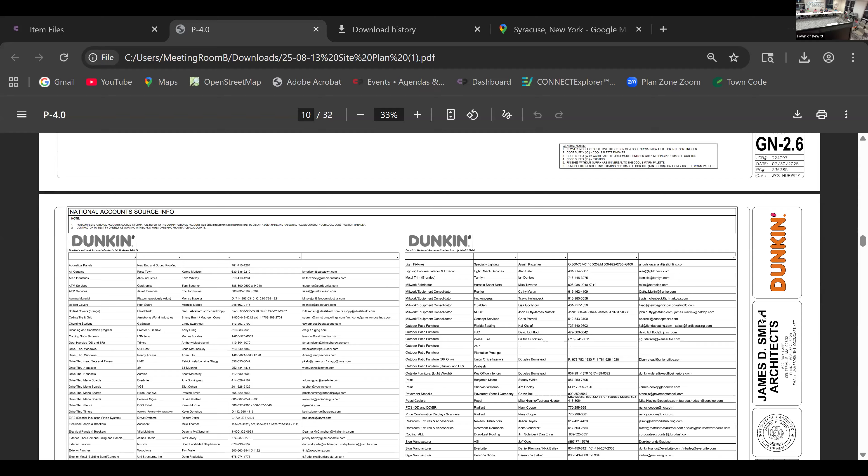We can talk about it and get back to you. Okay, because it has nothing to do with the outside. We can hold on the outside, that would be very favorable, you can keep your millwork on order. Looked like you were just replacing a lot of the beverage equipment, food service equipment, like new tables and chairs. Exactly, it's a paint and polish inside.

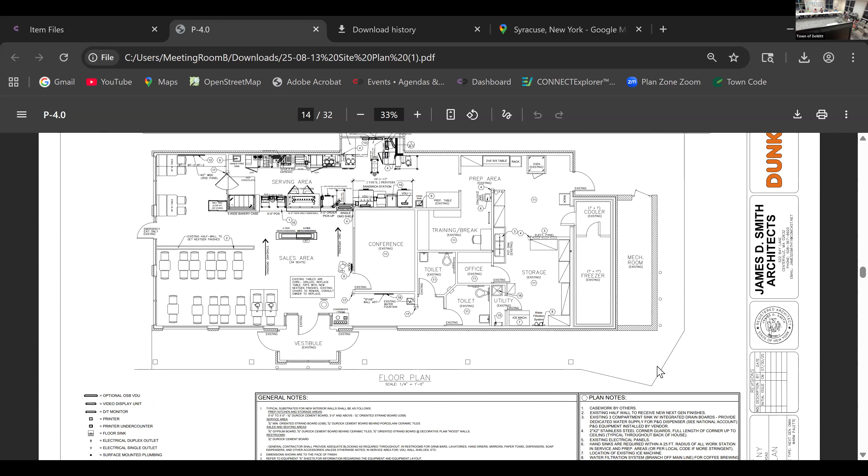Either way, if you want to submit a building permit, even if it doesn't get issued until after this is approved, the code enforcement officer can start to review it. Okay, so if you want to separate the drawings accordingly and submit it that way, then okay.

All right, thank you. Okay, thank you. Thank you, thank you, have a good evening. You too, thanks guys, thank you.